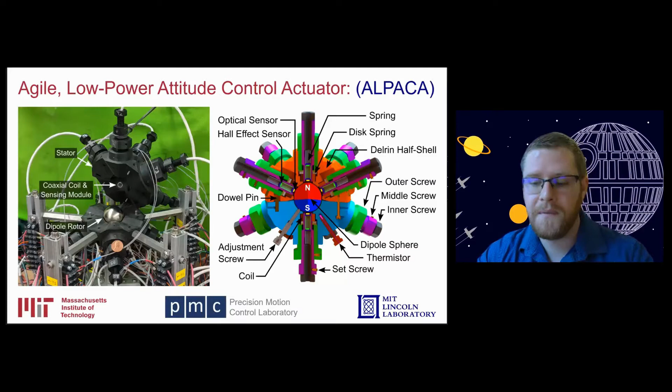So far, we've been able to demonstrate that we can control the sphere's position in 3D space. So here we're going to have the sphere track a sine wave in the x, y, and z directions.

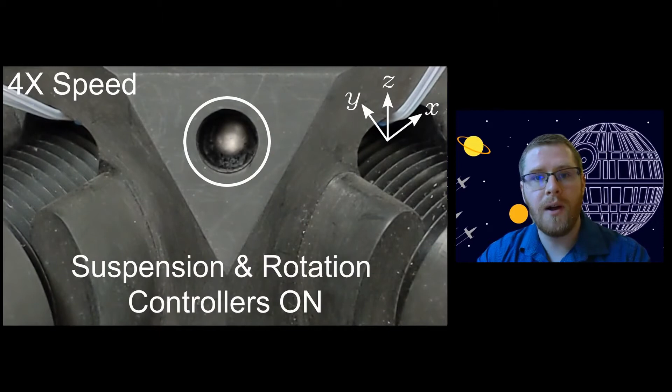Additionally, we've been able to show that while having the sphere levitate, we can spin the sphere about the x, y, and z axes. So here, the sphere is spinning about the x-axis, the y-axis, and finally the z-axis.

So if this interests you, please stop by my poster. I'm happy to give you more information.

Hi, my name is Anthis, and I'm a second-year master's student in the Precision Motion Control Lab. In our lab, we use magnetic actuators extensively, and in order to drive them, we need transconductance amplifiers, which provide a current to our actuators as specified by a voltage input.

I've designed a linear transconductance amplifier for general use in our lab by employing classical loop shaping techniques, as well as electrical and thermal analysis.

I chose to implement a lead lag compensator for system control, whose crossover frequency and breakpoint frequencies can be easily adjusted for a particular actuator by choosing the values of 3 passive components.

In my electrical design, I included many safety features to prevent actuator and amplifier damage, and also added a buffered feedback signal output so we can display that signal for troubleshooting.

These amplifiers are a simple, low-cost method of powering magnetic actuators. They are widely configurable and robust, and will hopefully save us time and money as they are used to power various setups in the lab.

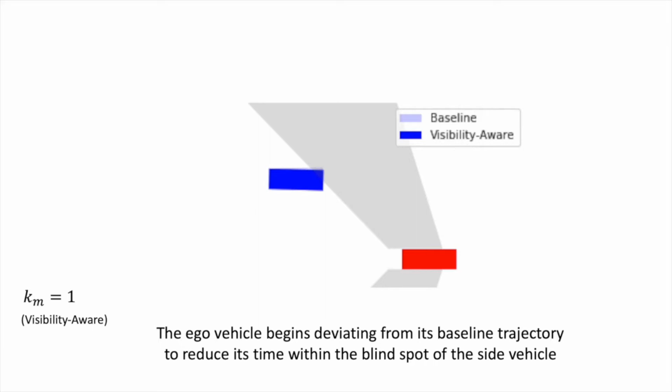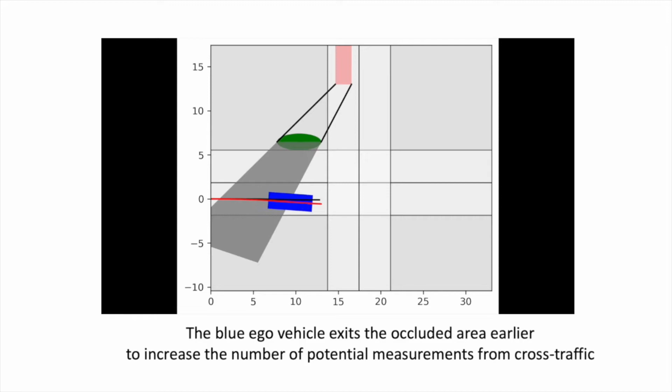Hello everybody, my name is Joshua Sohn. I'm an undergraduate student working under Moses Nah and Professor Hogan at the Newman Lab.

In this project, we attempt to understand why and how humans are so much better at manipulating complex objects when compared to robots, despite our hardware being so much worse.

We contend that this can be explained by the internal model hypothesis, which says that prediction based on some sort of internal model plays a prominent role in how our motor control works.

To do this, we analyzed how humans operate an object that is extremely complex, yet still very common: the whip. Since everything was remote, we simulated how a human arm cracks a whip by creating a model with a Python simulation package named MuJoCo.

Because the whip is such a complex object, it's almost impossible to simulate an exact replica of the whip as one continuous object. So we simplified it into point masses connected by massless cylinders.

The goal of my UROP was to explore whether mass tapering makes any quantitative or qualitative difference in the movement of the whip, specifically the maximum velocity of the tip if and when it cracks.

This research is fundamental to understanding the mechanism behind human movement, and we hope it can be applied to improve robots in the near future.

Hi, my name is Caroline Mccue, and my poster is on particle-assisted protein crystal nucleation towards crystallization in downstream protein purification. A major challenge in manufacturing protein-based drugs is the high cost of consumables used for chromatography.

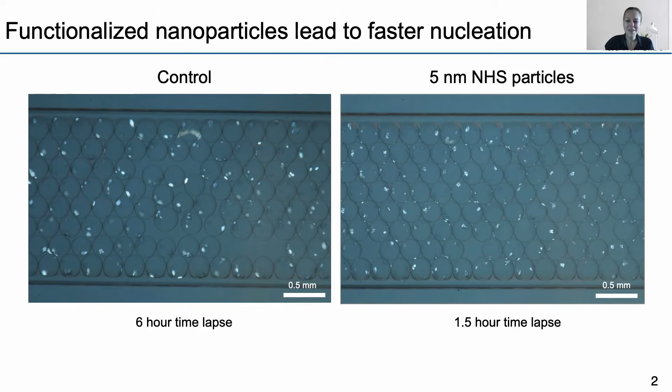Under the exact same conditions, you can see that the drops containing functionalized nanoparticles crystallized much faster. If you'd like to learn more about this study, please come check out my poster. Thank you.

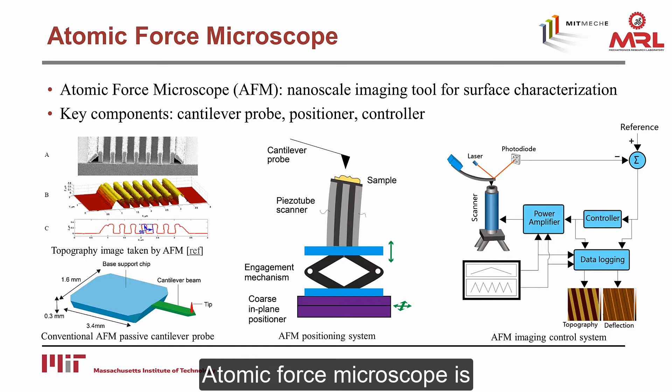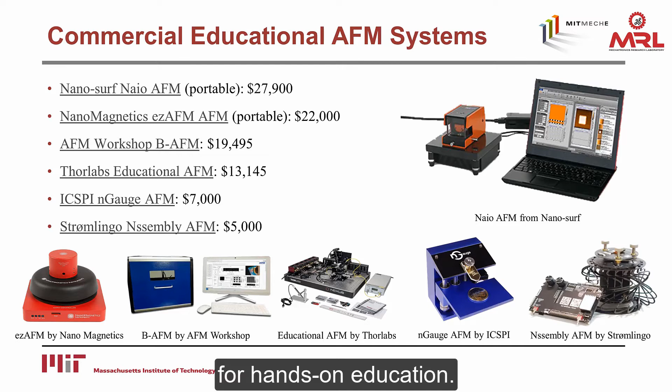Atomic force microscope is a nanoscale topography imaging tool for surface characterization. The development of an AFM as a mechatronic system requires trained engineers with multidisciplinary backgrounds. Traditional AFMs are too expensive for hands-on education. In this work, we developed a modular low-cost, less than $4,000 AFM for precision instrumentation education.

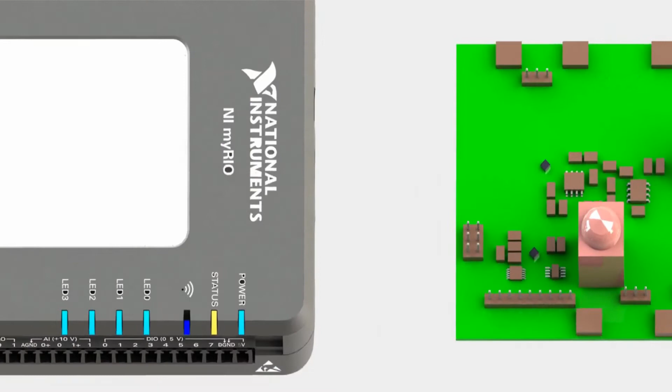The educational atomic force microscope design has 9 primary subsystems including a piezo buzzer-actuated scanner, an active cantilever probe, a Wheatstone bridge amplifier, a signal generator and demodulator circuit, a National Instruments myRIO, a stepper motor driver, a coarse positioner engagement system, a buzzer scanner driver circuit, and an optical microscope.

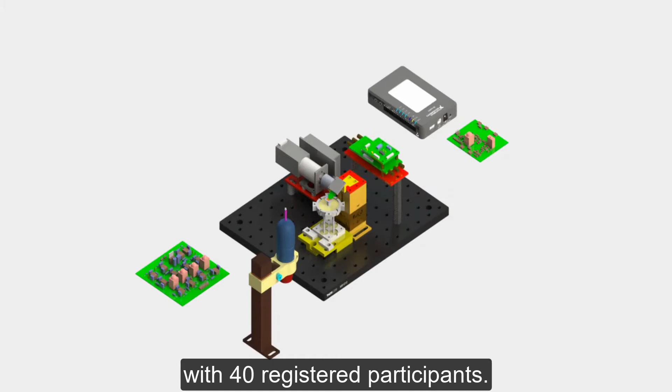An educational workshop was offered at MIT during 2020 IAP on the AFM topic with 40 registered participants. We plan to develop a full semester curriculum centered around this system.

Hello everyone. I'm going to take this minute to give you a short tour of what my work is about. We at the Laboratory for Bio-Inspired Photonic Engineering work on different classes of materials that all have interesting optical properties.

Some of us have been focusing on tunable optical properties, for instance, color-changing materials. I mostly work on stimuli-responsive photonic hydrogels, and in my poster I'm going to show you how we can start from a nanoscale material to build a functional material that shows dynamic and responsive behavior on macro scale.

Hi, my name is Ryuichi Iwata. I'm a visiting scholar at Device Research Lab. I'm currently working on bubble dynamics in water splitting to improve hydrogen production efficiency.

Bubble growth and departure are ubiquitous phenomena in gas-evolving reactions which govern the overall energy and mass transport. However, an in-depth understanding of the relationship between bubble dynamics and electrochemical processes, in particular the wettability effect on a gas-evolving porous electrode, remains elusive.

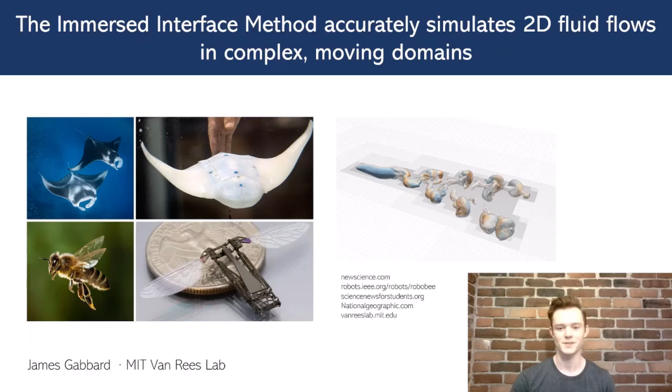But simulating moving surfaces is challenging for CFD packages that rely on a body-fitted mesh. Constant mesh adaptation is expensive, and frequent remeshing reduces the accuracy of simulation results.

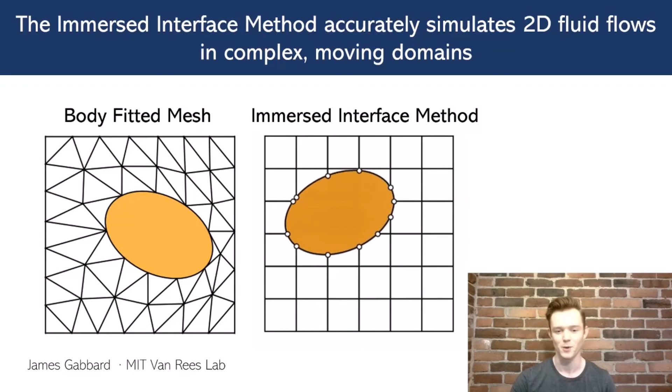In my research, I've explored an alternative strategy based on the immersed interface method, which eliminates most meshing costs while maintaining high-order accuracy. Over the past 2 years, I've developed this simulation strategy into a software tool that can tackle a variety of 2D flows with complex moving boundaries.

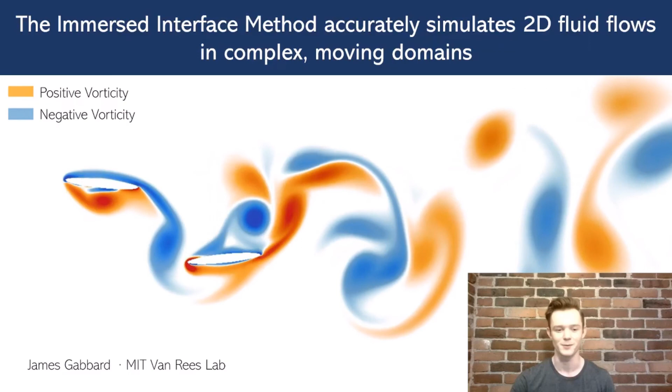These algorithms will be useful for exploring new design and optimization methods and serve as a jumping-off point for 3D simulations and fluid structure interaction problems. I encourage you to stop by my virtual poster for more details and to check out more flow videos. Thanks for listening.

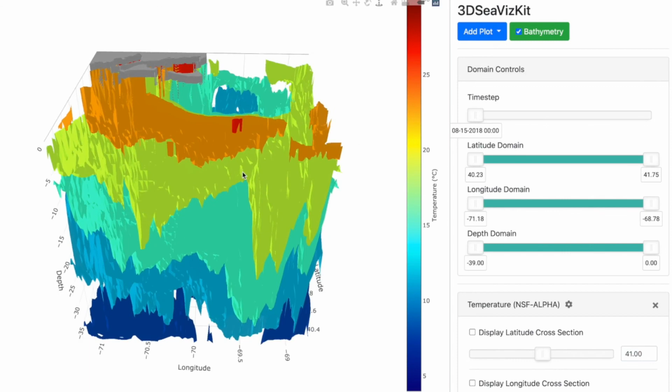3DSeaVizKit is a tool we've built that allows scientists to interactively explore 3D oceanographic data in a web browser. Let's take a look at a live demo of this tool in action. We can explore ocean temperature off the coast of Massachusetts using 3D isosurfaces or interactive cross-sections.

Moreover, we can visualize velocity data using stream tube plots, such as this one of the Western Mediterranean Sea. Furthermore, 3DSeaVizKit can explore subduction using particle trajectory data. We can also filter trajectories interactively based on the depth that they reached or other criteria.

In summary, 3DSeaVizKit is a visualization tool that greatly reduces the mental overhead for exploring 3D oceanographic data and allows scientists to more quickly reach physically meaningful interpretations.